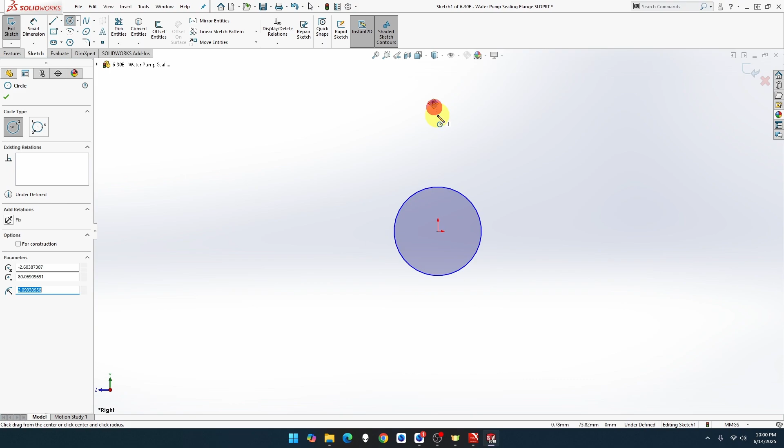This episode, we're going to build part 6-30E, the Water Pump Sealing Flange for the Clayton Undertype Steam Wagon. It's a file new, part, MMGS. Okay, let's go right plane, sketch. We're going to do circle, put it there. Do another one there. That may seem familiar. Oop, let me undo that one for a moment. That was a bit small.

1, 2, 3, and 4. So this point and this point will be vertical. These two circles here will be equal. Okay, so where are we? 38. So smart dimension, 38.

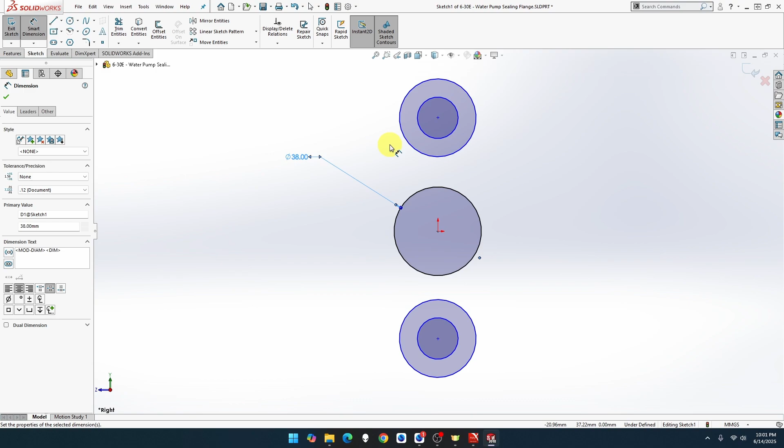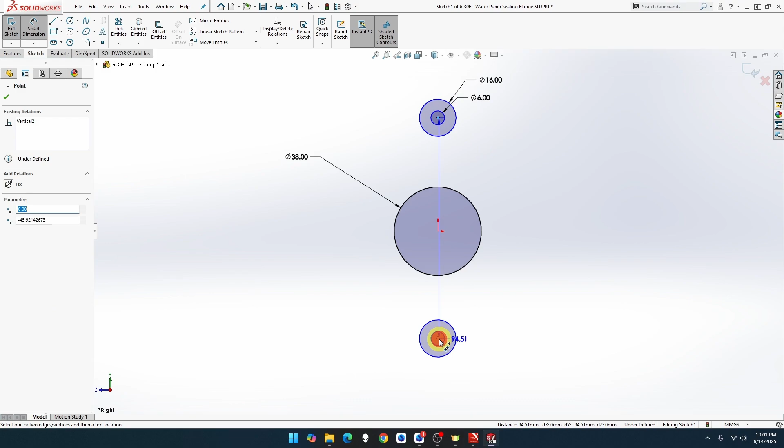Then we got the radius of 8, so it's gonna be 16. Then the end one will be 6. There we go. And from there to there will be 44. Oop. You know what? I'm going to take that one there. Oh, where did it go that far back? 6 that was, wasn't it? Yeah, there you go.

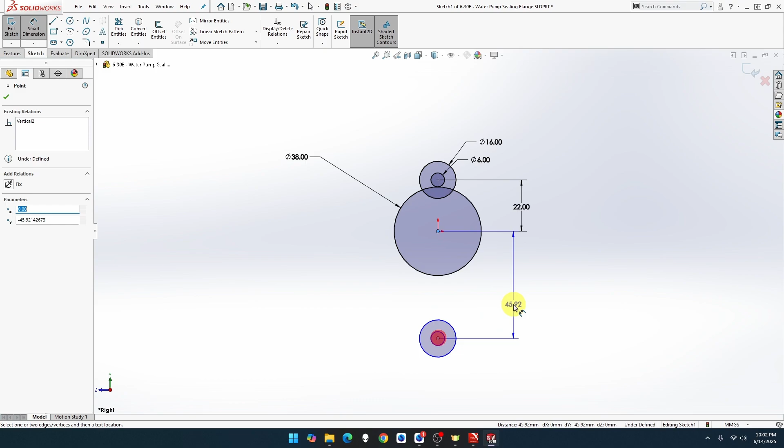So I'm going to do this one from here to here, 22. And this one to there will be, nope, that's not what I want. Dang it. Try again. Because I still had that selected. So that's going to be 22. There we go. Now, bring that down. Zoom in a bit. There we go.

Do some lines from there, there, there, and there. Let's just do these 2 lines here. The circle and the line's going to be tangent. This circle, this line will be tangent. I'll try again. You got to press shift to highlight too. Shift pressing. There we go. Perfect. Let me move you across there.

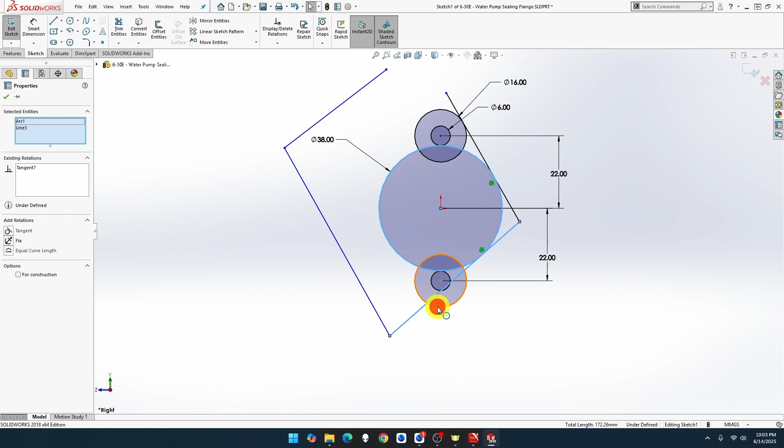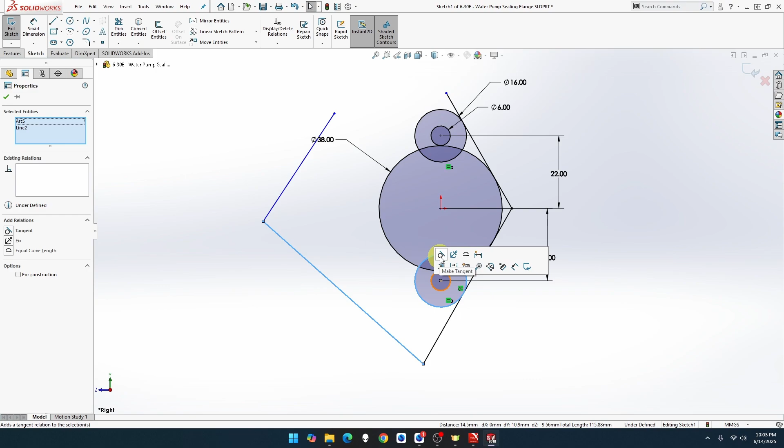Thank you. So this line and this circle will be tangent. This line and this circle. Let me just make sure. Oh, what happened? Oh. Click too many times, you actually go out of sketch. I actually learned something. Okay, this line, circle, will be tangent. Beautiful. This line, this circle will be tangent.

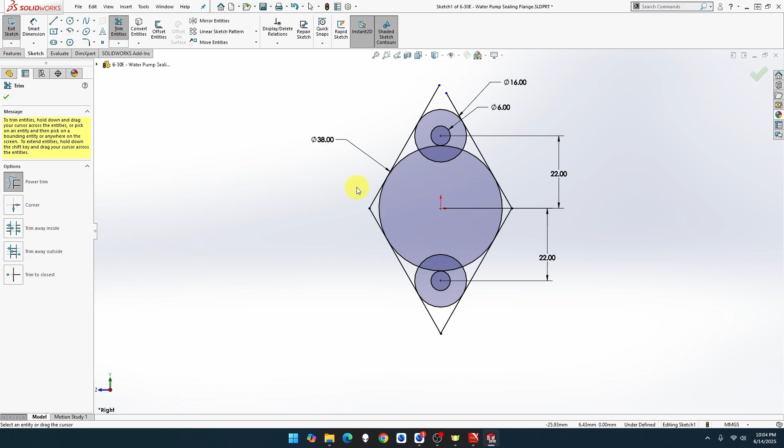This line, circle, will be tangent. This circle, this line will be tangent. And last but not least, this circle, this line will be tangent. Did it go in the right spot? It did. Beautiful. Looks like a weird snowman. Okay, let me take you 2 out. Have a wonderful time. There we go. Okay, so now we want 1, 2, 3, 4, 5, 6, 7. And that's done, fully defined.

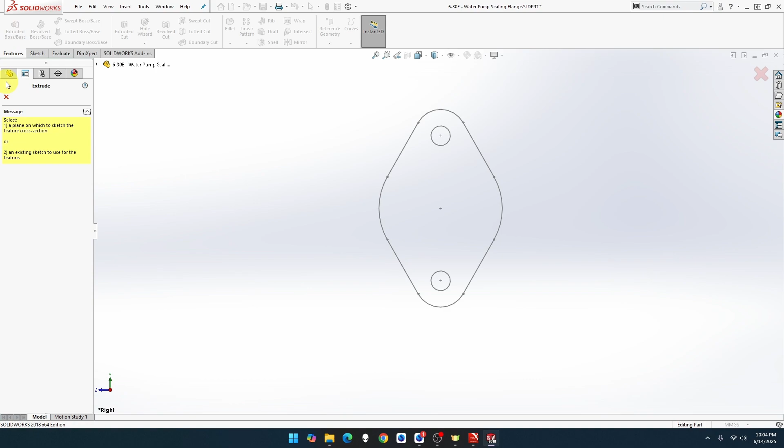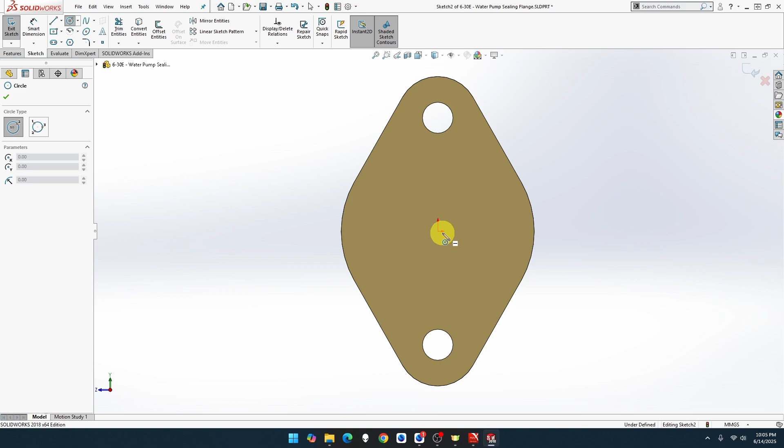And we've got extrude out of 5. Oh, what happened? Pick sketch, then extrude out. That helps. 5, not doing mid-plane. Doesn't really matter on this one. Okay, so that's good. Now we want to do sketch. Normal to sketch. Circle, center. And that's going to be 25. And that's going to extrude out by 14.

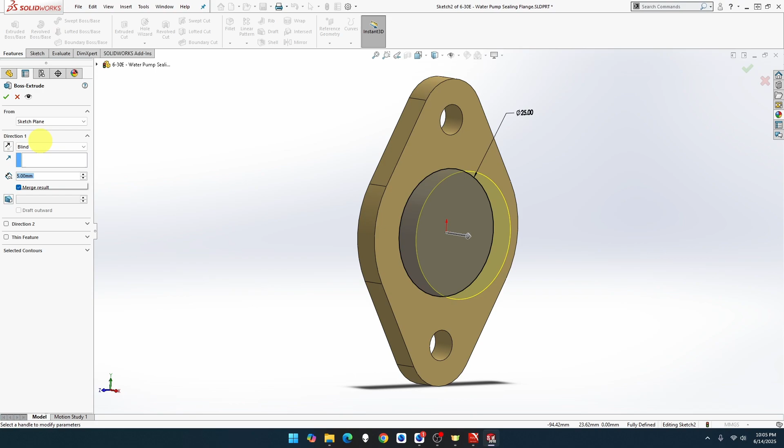Done. Then we're going to do another circle before we do sketch. Circle in the middle, and that's going to be 19. Oops, sorry. 19. Thank you. And that's going to be extrude, cut, through all, and done. And that's that piece done.

You put that in the right position. There we go. It's good. Zoom right in. Zoom in a bit more. There we go. Perfect. So that is part 6-30E, the water pump sealing flange for the Clayton Undertype Steam Wagon, done.